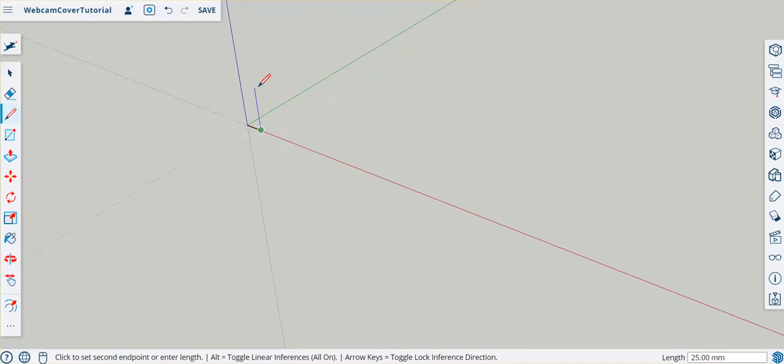Right, let's get the pencil. I'm going to click in the origin, come along the red axis and type 10. That's going to give me a 10mm line. Using the mouse wheel, I'm going to zoom in. I'm going to go up onto the green axis, type 10, press enter, come back across the red axis, click at 10mm, and then finish off having a rectangle.

Now I'm going to go to the push-pull tool. I'm going to take that up 1mm. So I've now got a 1mm thickness.

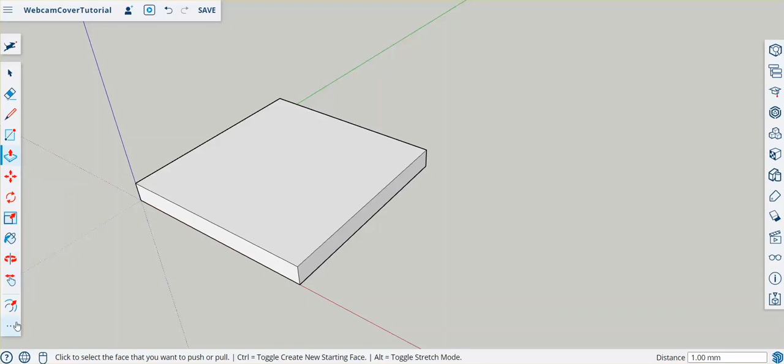Let's go with an offset now. So the offset tool is here, if you can't find a tool that I'm using, click on these three little dots, the ellipses, the offset is there. So I want to use an offset. Click and pull in, and this needs typing. I want a 2mm offset. On that 2mm offset, this is now going to give me the point for my little posts to clip.

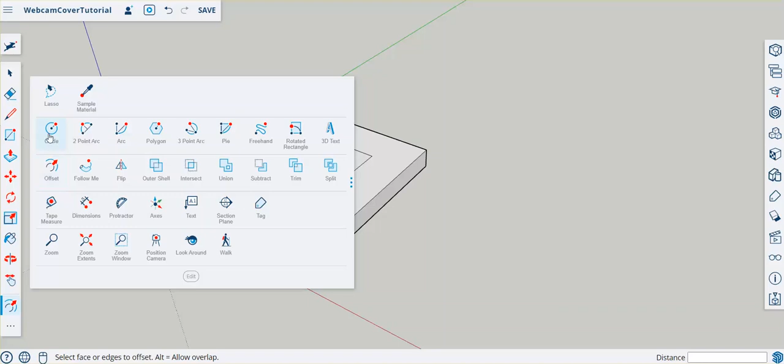I'm going to go back to find the circle tool, and I'm going to click and pull, and it should... no, I want a 1mm radius, so type 1, click, oh, it's snapped to 1 that time, click, type 1, enter, click, type 1, enter.

Now I've got these posts in place. I'm going to go to the eraser tool, and I'm going to take out the lines inside the circles. I'm going to leave that one there. I'm going to take this one and this one out.

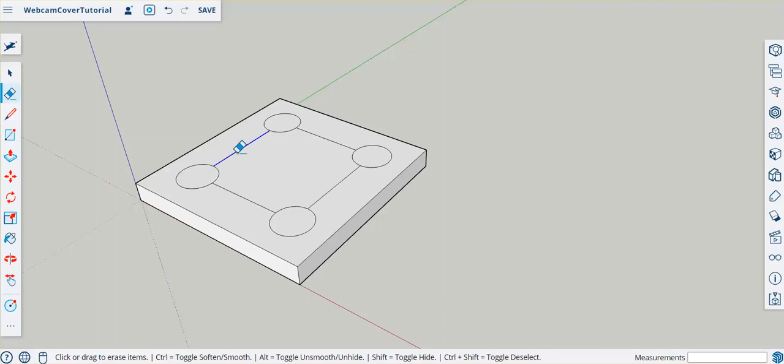Going back to my pencil, top of the circle to the top of the circle. Now I'll know it's top to top because I can see it goes red. It's showing me it's on that red axis. And again, top to top there.

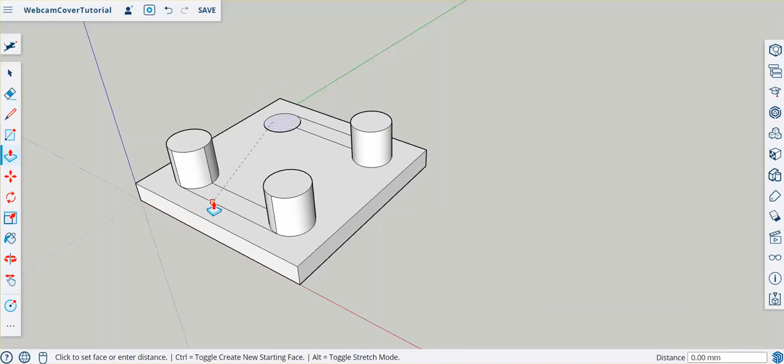Next, I'm going to use push-pull. I'm going to push this 2mm high. Now I can either do that again, push and press 2 and enter, or I can push and then just go to the level. See, it's showing me the level, so I can just pull and it will level off with whatever I'm touching. So that's the face, that's the actual post. There's a couple of ways of doing that.

This needs to be a little bit more than 1mm high, so I'm going to take this up. I've got to move up first. I'm going to go to 1.3mm, and there'll be a reason for that in a minute, you'll see in a moment. And again, this one here, I'm going to take that to 1.3, which is the same as over there.

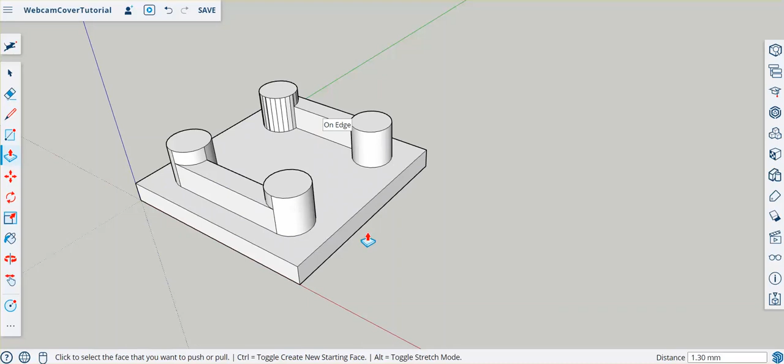Now, our next step is we've got our base. We're going to need a top to go on this base, which will click into place. So the easiest way to do that is using copy and paste. So if I triple click, it selects the whole model. Control C, Control V, I've pasted another version of that.

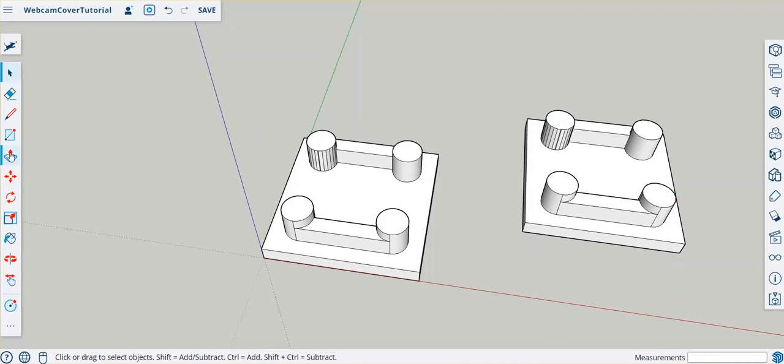I'm going to go to the arrow and click away to deselect it. All I'm going to do now is go back to that tool and just shrink everything back down into the base. I'm going to get rid of these lines here and get rid of these lines here. And I want to have 4 holes which these can go into. Now, at the moment, that is a 2mm diameter, and that's a 2mm diameter. It's not going to fit in.

So we need to have a bit of tolerance, or allow a bit of a gap for that to go. That gap with the print I'm going to do is 0.2mm. It would be a nice tight fit.

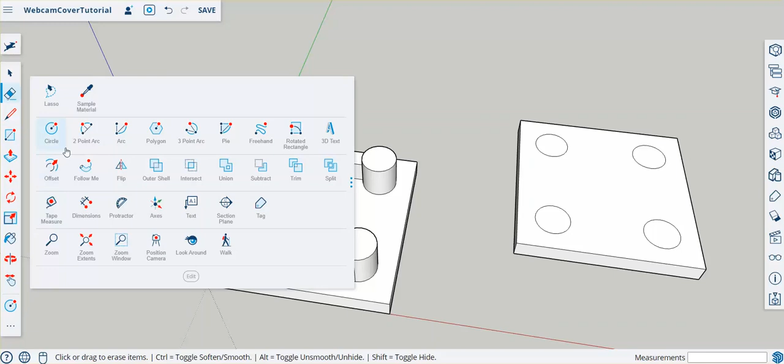So I need to go back and get my offset tool again. Back to offset, over here to the circle, click, pull away, and I just want to go 0.2mm. You can see it's drawn a bit of a bigger circle for me. Pull away again, 0.2. Now I need to pull away, because if I go inwards and do 0.2, I'll get an inner circle, and I don't want one of them. Control Z is undo - Control Z is your best friend. And then 0.2, and again over here, drag out 0.2.

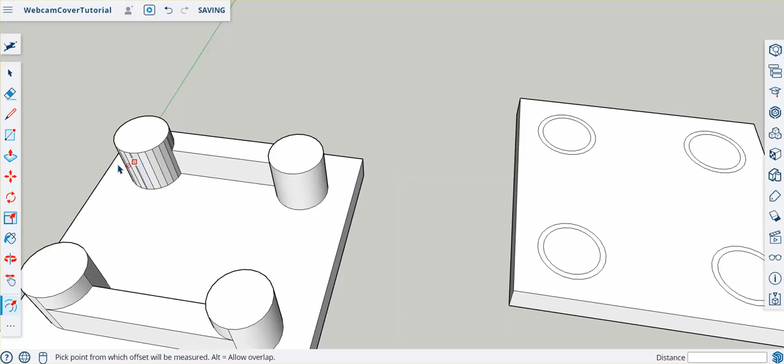Now I need to get rid of the inner circles, so say goodbye to them with the eraser tool. Mouse wheel out, mouse wheel in. See how I line that up there?

So sometimes you want to be looking at something else. The easiest way is to zoom out, put your mouse where you want to be, and zoom back in again, and it'll take you to that point.

With the eraser tool, it should normally take the whole thing. See, that one took the whole circle out. That took the whole circle out. That took the whole circle out. This isn't being very happy.

Let's just carefully erase this. Now, with the eraser, it's best doing it in chunks rather than doing the whole thing, because if I slip, I end up having to press undo, and then I undo a lot more. So when you're taking little bits out, chunk it.

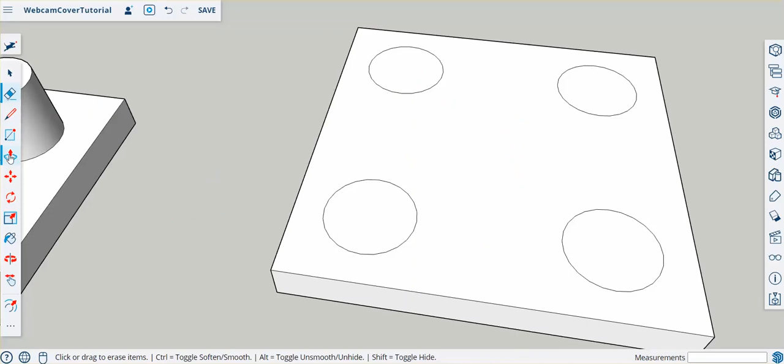Right, I've got my circles now, which are going to have the pegs that will fit into them. I'm now going to go to my push-pull again. Here with the push-pull, I'm going to click and then just go to that line there, which will take it through. See how it's now gone through?

And again, I can click and go to that, click, go to that line. I can do it with these as well. It'll just level off - see how the little square appears, I'm just at midpoint there. So we've got our top to clip on there. We need our thing that's going to slide through.

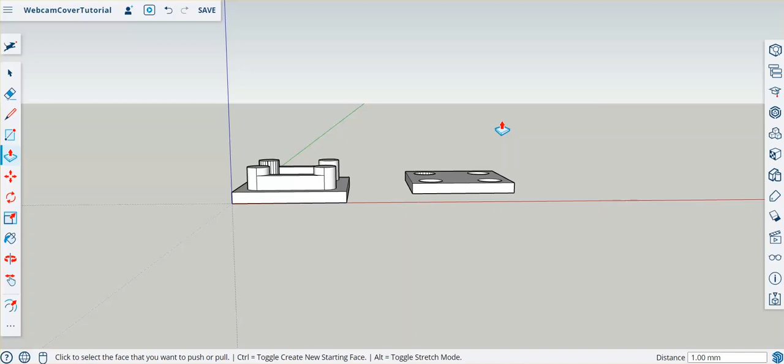Now what I'm going to do is, these sometimes may not be on the same plane, the same flat plane. Also, when they're printing out, if this is printing, it's going to print the bottom of here, then the printer head's got to go all the way over there and print this and all the way back.

So to save some time, I don't want it too close, but if I just draw a 2mm line on the axis there, click, triple click here, I'm going to take the move tool, zoom in, grab the bottom corner of this and just take it to that end point. Now they're on the same level, so they're both flat on the floor, on the print bed.

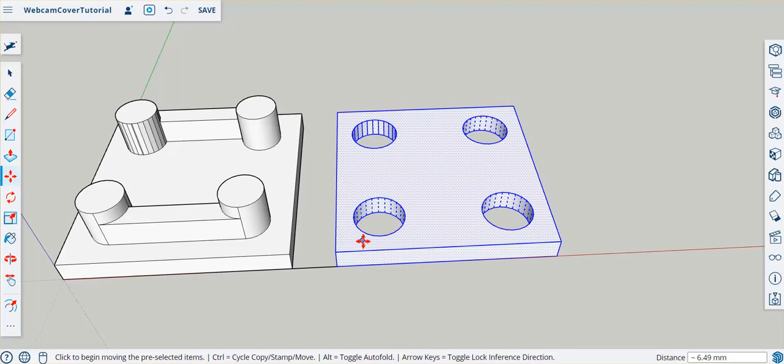I just need to remove this line. Now the print head has got less travel, but also it's going to be a lot more efficient because they're pretty in line.

Right, I need to draw my little pop out here. So this is going to be the basics of everything that we build upon - we're going to build the basic model, and then I'm going to make the additional cool bits.

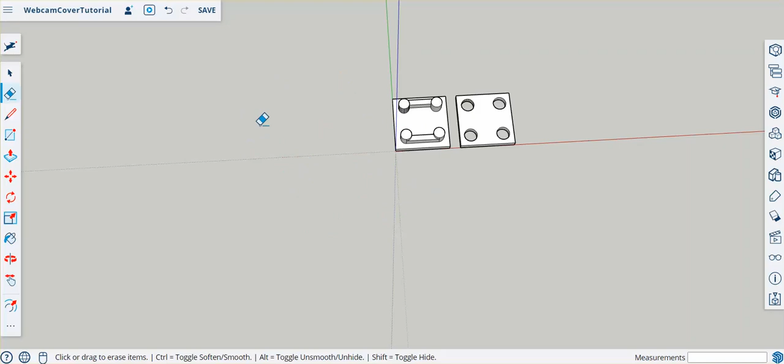Now, I need a circle to cover my webcam. So this is going to be next to the webcam, and the circle is going to pull out and cover the webcam, and then push away and not cover the webcam. So let's go get a circle.

So in the tools here, I want the circle tool, and I'm going to draw myself a circle. I want this circle to be a certain size in millimeters or centimeters, so I'm going to do a 5. This always works on radius, so a 5mm radius will give me a 10mm circle.

Now, from my circle, I need to have a little stick on it, which is going to slide through this gap we're going to have in here.

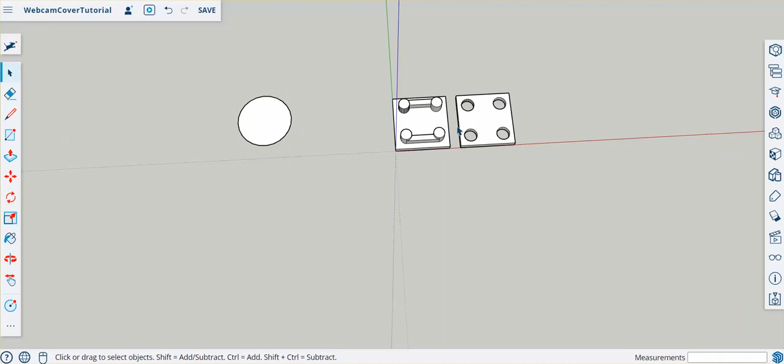Now, I need the stick to be smaller than this, so I need to know how big that is. Now, there is a measuring tape, but I like to use the pencil because it's just as easy to measure with the pencil as it is with the tape. So I'm just going to go and get to the topmost point of that circle I can find and draw straight across to that one.

And I can see, if I just leave that line there, I've got 4mm here. I wouldn't have actually drawn that line. I would have left it, but I'll just undo it in a second. So 4mm, so undo. So what I would have done, I'd have gone to here, click, pull across. I see it's 4mm, and then I just press escape and I don't put the line in.

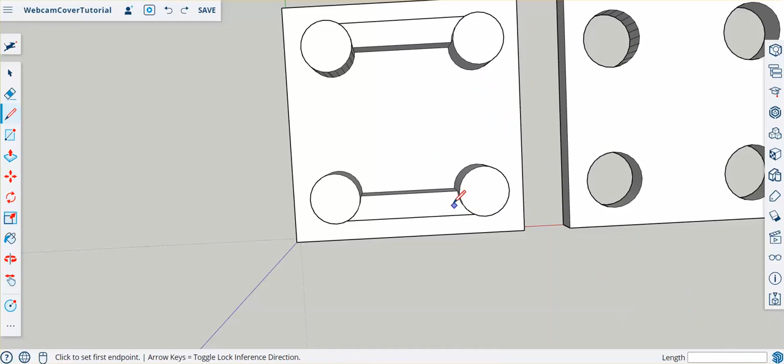So now I know I need something narrower than 4mm. So I'm going to go with 3.5mm for my stick that's going to be on here. So first of all, I'm going to go to the middle of the circle. I need it to be able to cover, so I'm going to give it a 20mm line, so 20mm there. That's going to allow this to definitely have enough space to pull out over.

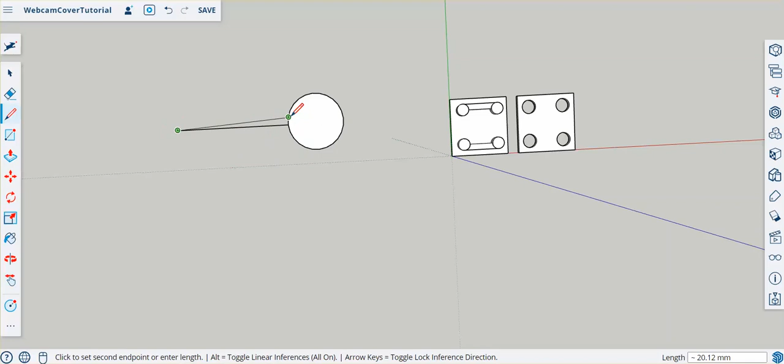I need this now to be 3.5mm. Now I like things to be symmetrical, so I need to halve 3.5, so 1.75 on the green axis. I'm just going to press escape to stop that line there, and I'm going to go upwards on the green axis, and again 1.75. Enter. Now you'll see, if you look down there in the length, I've got 3.5mm, so I've got the space for that to slide through the gap.

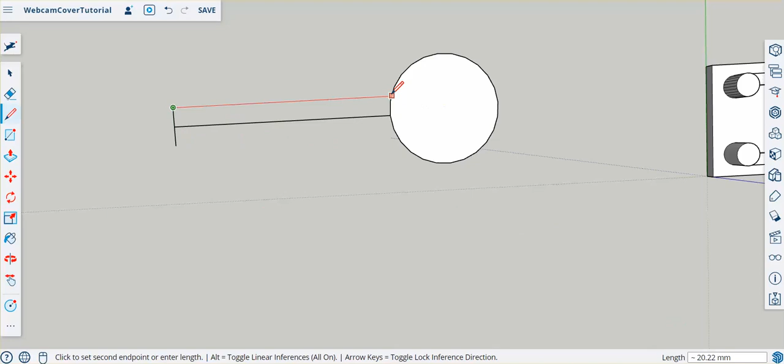I'm now going to bring this back on the red axis to keep it nice and straight and intersect with my circle. Sometimes it doesn't want it, there we go. You have to take a bit of time sometimes. I'm now going to rub out the lines I don't need. And now, if I put that in that gap and pull, it'll just pull through. So I need to put a stopper on the end.

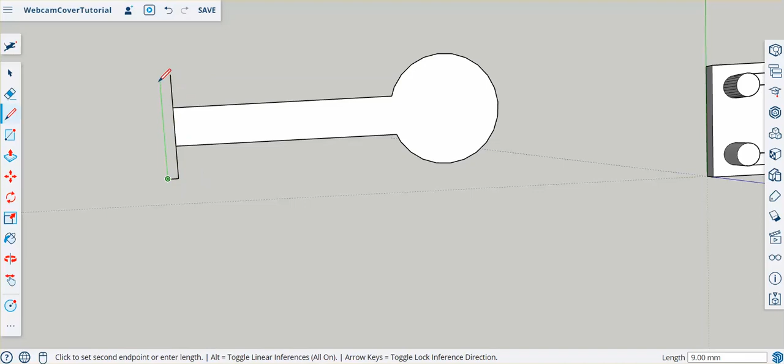So with this stopper, I know that this is 10mm. I know this is 3.5mm. I'm just going to round that up to 4 to make it easy. So I need to add 6mm on, so I can add 3 on this side. I can add 3 on this side. I'll just do my check. There we are. I've got 9.5mm. I now need to come this way 1mm, up level to 9.5, and then box it off and then just go and get rid of that there.

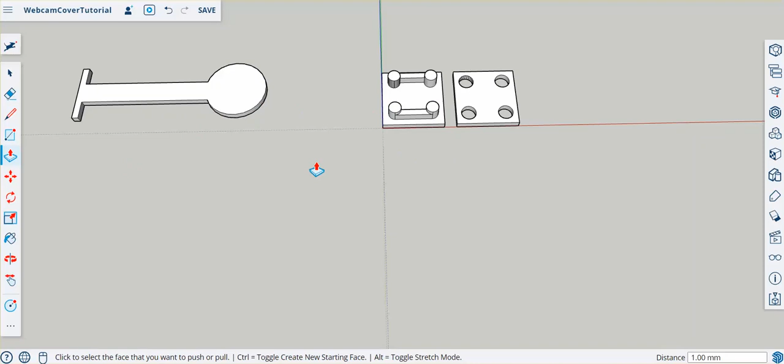Clearance wise, if you remember, this wall here is 1.3mm. So if I make this 1mm thick with the push pull tool, 1mm, there we go. That will not get trapped by the top when we put it on. So the idea is this is going to go in there, that's going to go on the top, and then we'll have a little stick to pull and push out. This is probably the point where I cut to show you the model in real life.

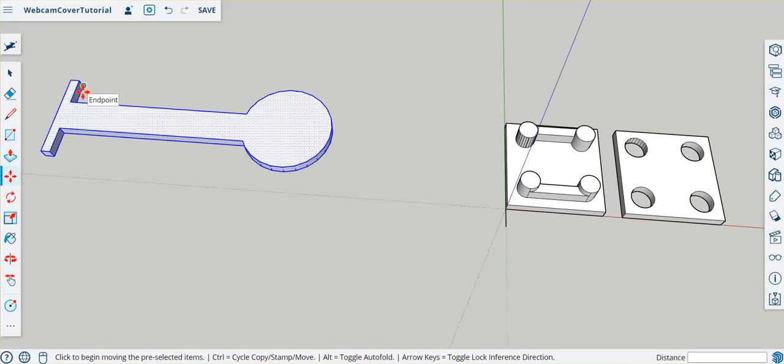So for alignment, I need to get this next to these again to help it print out. I'm going to go and draw myself again that 2mm line, and then I'm going to give the arrow, triple click, take that point there this time, so the bottom corner, and I'm going to try and take it now. I might need to rotate to let this happen so I can see what's going on. Bottom corner onto the end.

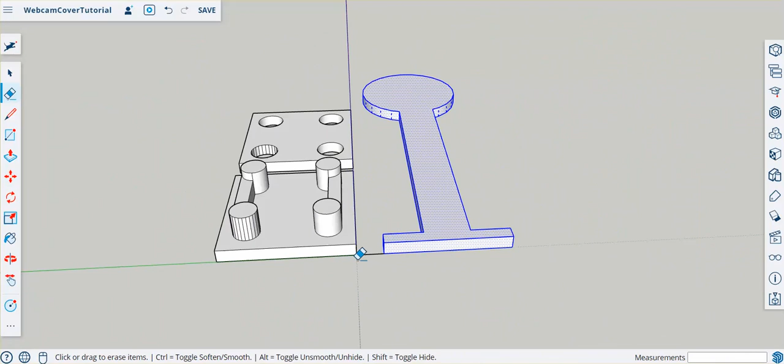Doesn't look like I've got the bottom corner. Let's do it again. Grab the bottom corner onto there. There we go. Now that's it. That's level. Now you could align it so it was a bit closer if you wanted to. That's good enough for me. Remove that line. I've now got my product ready to stick on the printer and get it printed out.